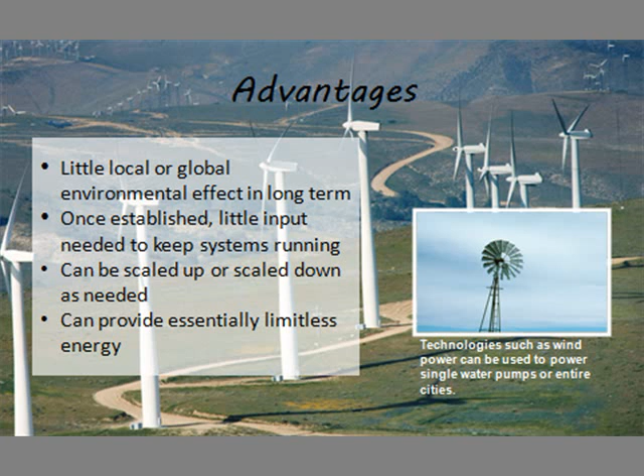As I wish they were, renewable energy resources are not the fantastic magical cure for our energy problems. There are large setup costs involved. For example, if you want to install a wind turbine or solar panels on your own home, it costs a lot in the short term, so it's very expensive to put into place. There is the possibility of environmental damage in the short term, and there's a limit to the efficiency of these systems, although hopefully with improved technology that can be overcome.

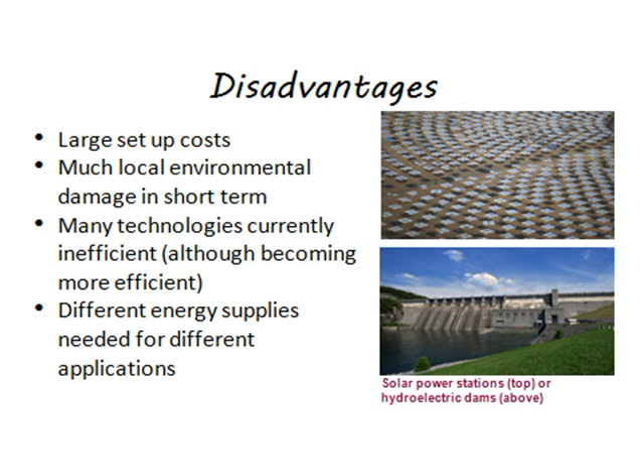And then, renewable energy resources aren't this kind of cure-all for our energy needs. You can't just say everything's going to be good if we use solar, or everything's going to be solved by using wind power for everything. Each region has to use renewable resources based on what's available in the area. For example, you wouldn't want to use solar power in a place like Seattle that doesn't get much sunlight, and you wouldn't want to use hydroelectric power in a desert area with no rivers. So it has to be tailored to the local area.

We'll talk about several different types of renewable energy as we go through this lesson. Of course, we're going to talk about the big three: solar, wind, and hydroelectric. We'll also talk about a couple of technologies that are a little more experimental, like wave and tidal power as well.

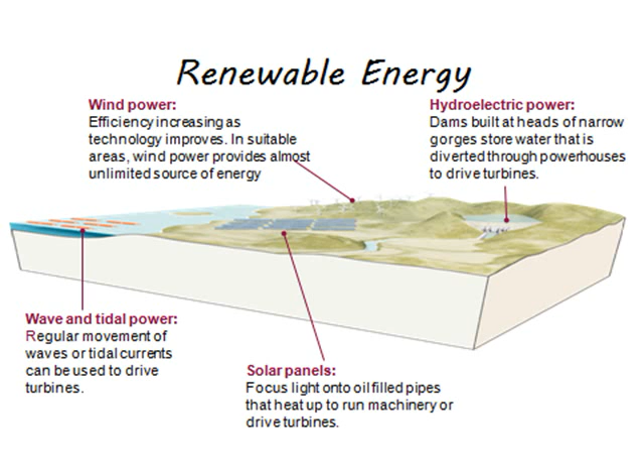Let's start with my personal favorite for the state of Texas, solar energy. If you ask most people what solar power is, they'll point out solar panels or solar cells, kind of like the ones on simpler calculators. But the truth is there are lots of different ways to use solar power. There's active solar power and there's passive solar power.

Passive is the easiest one to use, probably the cheapest one to do. It tends to happen when you're designing buildings that you'll figure in passive solar power, making sure windows are faced in such a way that they'll receive maximum sunlight, especially during the winter when you want to warm your house. Or you can use active solar power, for example if you want a solar powered water heater, which will heat up your water without using electricity.

Here we see passive solar design. The house is designed so that during the summer, with the angle of the sunlight coming in, it's not going to hit your windows, so you won't have extra heat in the house. However, when the angle of sunlight is shallower in the winter, you'll get some sunlight entering the house to help heat it up. And this requires no extra energy, no moving parts, and no expensive solar panels either.

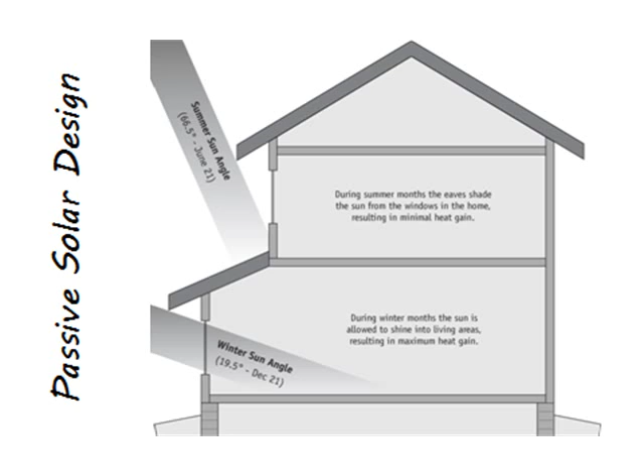On the other hand is an active solar collector. It looks like it has a solar panel in place, but that's actually a panel that absorbs heat from the sunlight, heating water so you can have a water heater powered by solar energy. There is a pump necessary to move the water around, and because it's actively using energy, that's why it's called an active solar collector. These are supposed to be pretty efficient and money and energy saving, since one of the major expenses in a house tends to be heating water for the water heater. So someday I hope to get one for my house too.

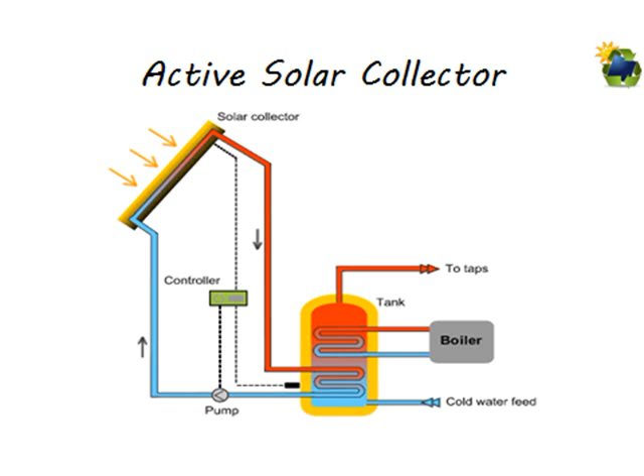So here is what most people think of when they think of solar power: a solar panel, otherwise known as a photovoltaic cell. Keep in mind the 'photo' in there means that it's activated by light, that's why you need the sunlight. The 'voltaic' part refers to the electricity that's being produced.

So how does one of these work? Well, you have to have a special material called a semiconductor, and you have a layer of that in the photovoltaic cell. When it gets hit by sunlight, an electron gets excited, kind of in the same way one gets excited during photosynthesis in the chlorophyll and pigment of a plant. In this same way, an electron gets excited after being hit by sunlight and absorbing the energy from it.

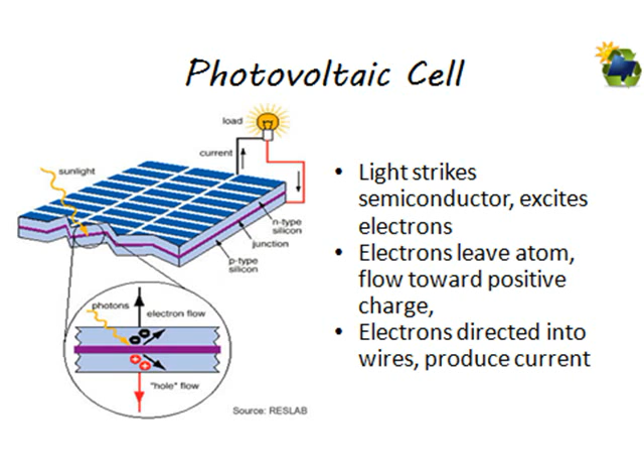Contrary to what you might imagine, a solar power station isn't actually a ton of solar panels all lined up. Solar panels tend to be pretty expensive, so you don't want to build a huge array of them. What's actually cheaper is to build something with mirrors that focus the heat or light of the sun. That warms up something, and that substance can be used to heat fluid or produce steam, which turns a turbine just like in traditional electric generating power plants. That's how most solar power stations work.

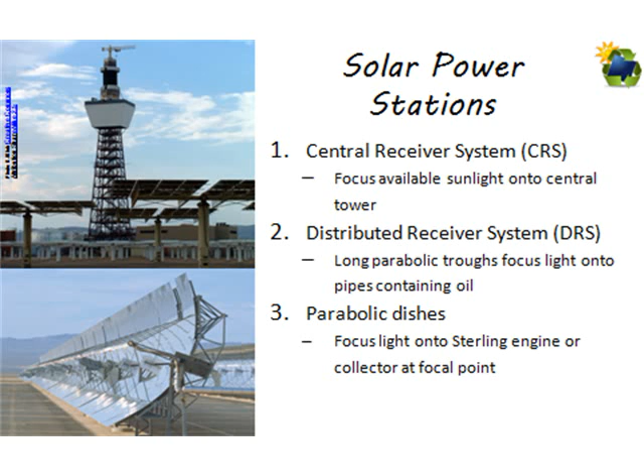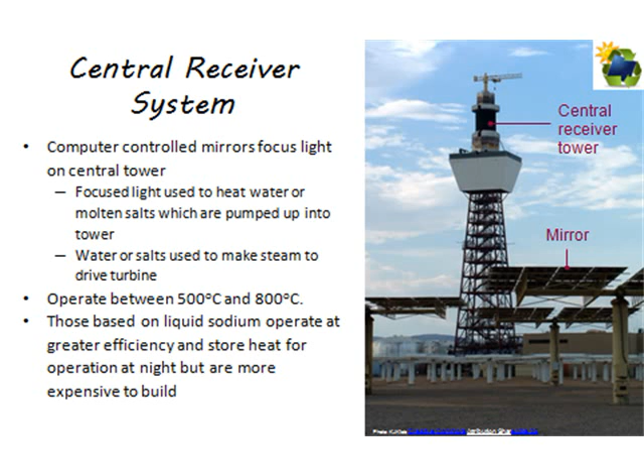Different solar power stations operate by different methods, though. You've got the central receiver system, where mirrors focus all the light on one central tower. That's where you'll have water or, in some cases, molten salts, which need very high temperatures to melt, heated up by this combined heat. After that, it's just traditional electricity generation.

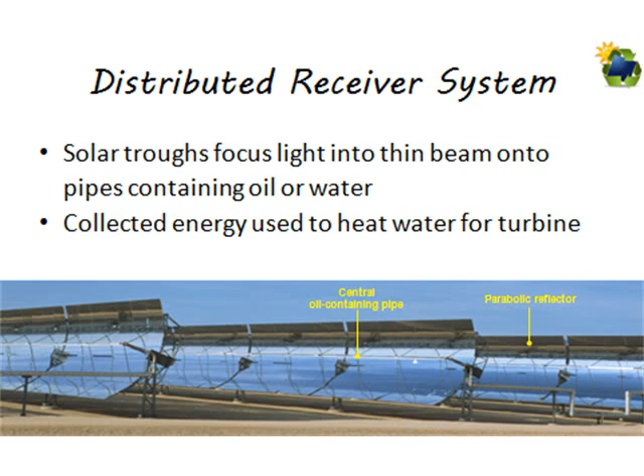A distributed receiver system, on the other hand, doesn't use a central tower. Instead you have curved mirrors that concentrate the light at a certain point, a certain distance from the mirror. At that point you've got an oil-containing pipe, containing material that heats up with all that focused light, and then you can use that to heat water to turn a turbine. Different methods of collecting the solar energy, but in the end the method of electricity generation tends to be pretty much the same.

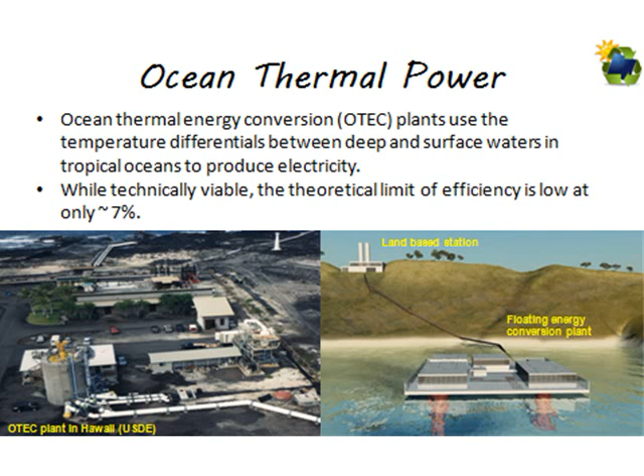Ocean thermal power is kind of a subset of solar power, since it relies on temperature differences between deep water and surface water, which is ultimately caused by the sun. You can use that to produce electricity, but it's really only useful in tropical areas, and it doesn't give you a lot of energy, so it has a low net energy yield. It's probably not going to ever be a very widespread technology.

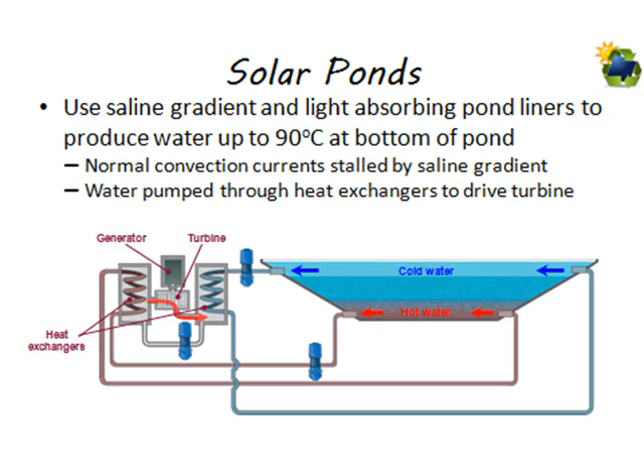Solar pond is another type of technology. Basically, you're getting the solar energy to heat up some water. To keep traditional convection currents from forming and allowing heat to escape into the air, you create a saline gradient, which disrupts the currents that could flow. You then have this light-absorbing material in the liner of the pond, which absorbs a lot of energy and heats up water. That water can then be used to heat up other water to create steam, which turns a turbine. So, a variation on the same theme.

They heat some water or some oil or some salt solutions that end up transferring their heat to the water that's turned into steam.

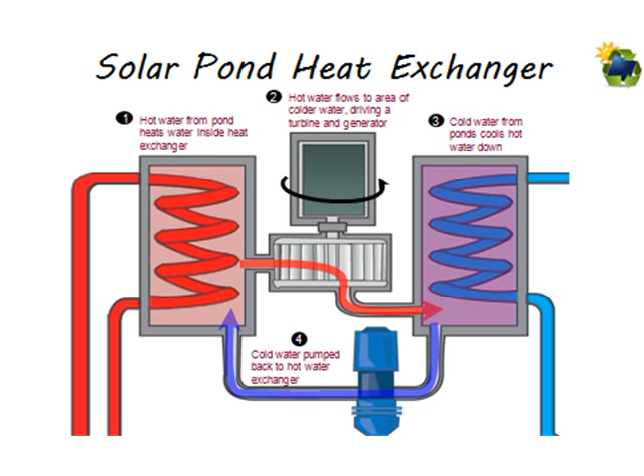Just a summary of the advantages and disadvantages of solar power. While it can theoretically provide a limitless supply, especially in areas with a lot of sunlight, that's not going to be efficient where sunlight is limited during certain parts of the year. There's a relatively high gain of energy, and it reduces reliance on foreign oil, which is an advantage of all the renewable energy resources.

It doesn't produce a ton of pollution just in making the solar panels or collectors, and that's the major source of environmental impact. Another drawback is that it can only produce energy during the daytime. However, you can develop the equivalent of giant batteries that can store this energy so it can be used at night.

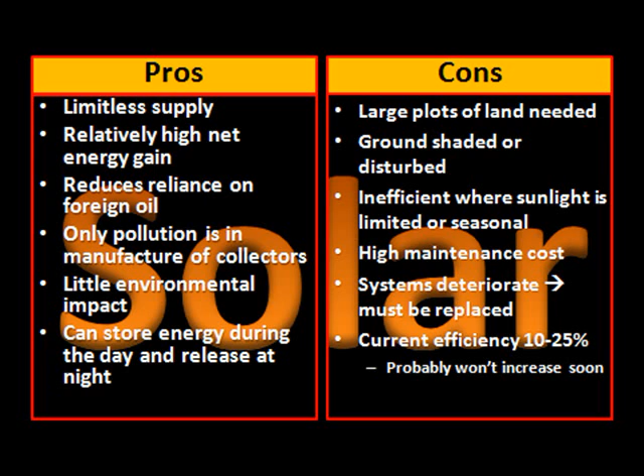Globally, as of when these images were produced, probably around 2007-2008, wind power produced about 1.5% of the world's electricity needs. However, it's not being utilized as much as it could be. For example, some estimates have said that wind power could generate most of the electricity needs of the United States from just a couple of regions having wind farms.

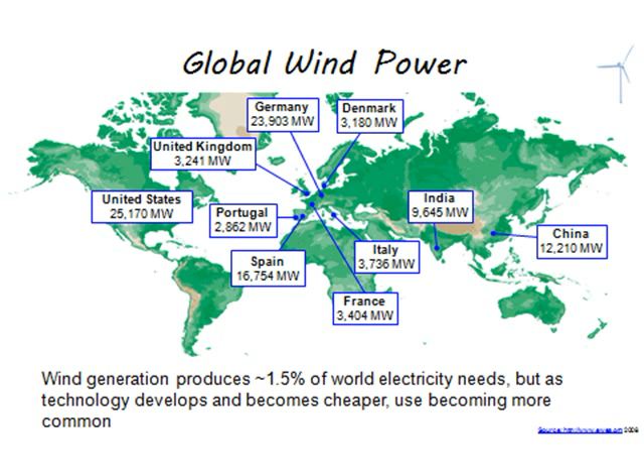As said on the previous slide, wind power has the potential to generate a lot of electricity. In fact, if you used wind farms in North and South Dakota and in Texas, you could provide electricity needs for the entire United States.

A couple of general facts about wind energy: if you want a completely efficient wind turbine, you need relatively constant speeds, around 20 kilometers per hour. There are some locations that are better than others for wind farms, such as tops of ridges, mountain ranges, coastal areas, and anywhere there are wide open plains.

The average turbine will produce anywhere between 40 and 400 kilowatts of power. This obviously depends on the size of the turbine. A couple of factors affect the amount of electricity produced.

For example, a very tall wind turbine will catch faster air currents and produce more electricity. And if you increase the length of the blades, that increases the electricity produced. In fact, if you double the length of the blades, you get a 4 times increase, or a 400% increase, in the amount of power produced.

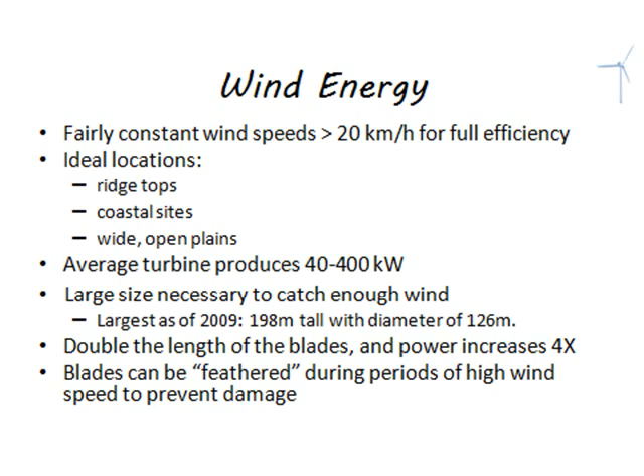Wind turbines do use the movement of a fluid to turn a generator, but they're not using steam, they're using the movement of the air itself. Remember, air is a fluid as well, it moves. So what happens is when the blades are turned, this is ultimately going to drive magnets inside wire coils, and that's going to produce electricity.

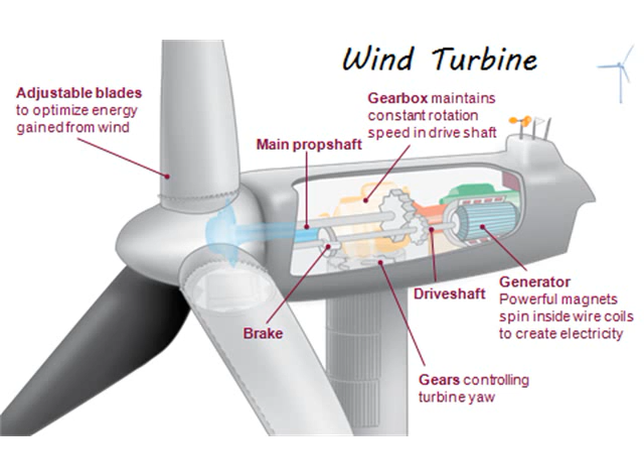That was our extremely brief presentation on wind energy. Some pros and cons: you can build wind farms relatively quickly, and you can even build them on sea platforms, so you can build them offshore. Once you get them built, maintenance is low and can be automated, so you don't have to have a person going out and maintaining these wind farms. You get a pretty decent net energy yield, and it doesn't produce pollution. A lot of times these are located in remote areas, so it won't bother people. And if you have these large turbines, you can use the land underneath for agriculture, for raising animals, etc.

Some of the drawbacks: you do require an area with steady wind, which minimizes the locations where you can use this. You have to have some backup systems in place for when you don't have wind. People consider them noise pollution and visual pollution, meaning they interfere with the pretty view. There's talk of noise pollution, although I've spoken with people who have been directly under wind turbines and they say there's no noise produced.

A big problem with wind turbines is that they can actually end up causing death of birds, bats, anything that flies in the air, because the animals don't see the turbines and they end up hitting them and dying. A major way to avoid this unnecessary death of wildlife is to research before you put a wind farm in place, making sure you're not placing these wind farms in major migration patterns. Birds tend to use the same route when migrating every year, so if you know thousands and thousands of birds are passing through an area, don't put a wind turbine there.

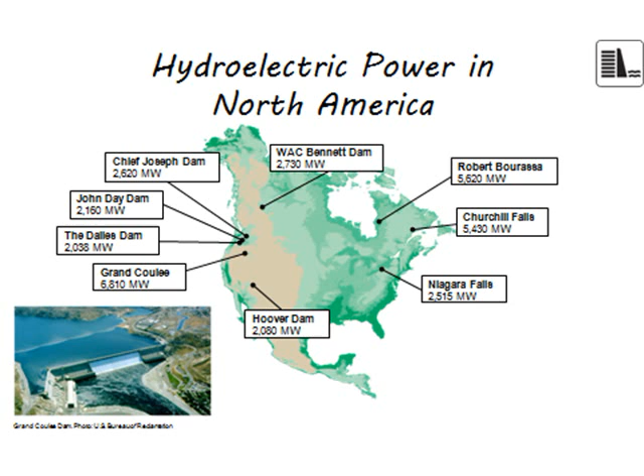Here in North America, we have a number of dams that produce electricity. The one that produces the most is the Grand Coulee Dam, up in the Pacific Northwest. The Hoover Dam is particularly famous; it's on the Colorado River. There are actually a number of dams on the Colorado River, which we'll talk more about when we discuss land and water management. You also have hydroelectric dams in Europe.

You've got to keep in mind, I said that the country of Germany uses a lot of renewable energy, but the thing with hydroelectric power is you've got to have a river in place. So apparently Germany doesn't have any rivers that are very easy for it to dam up.

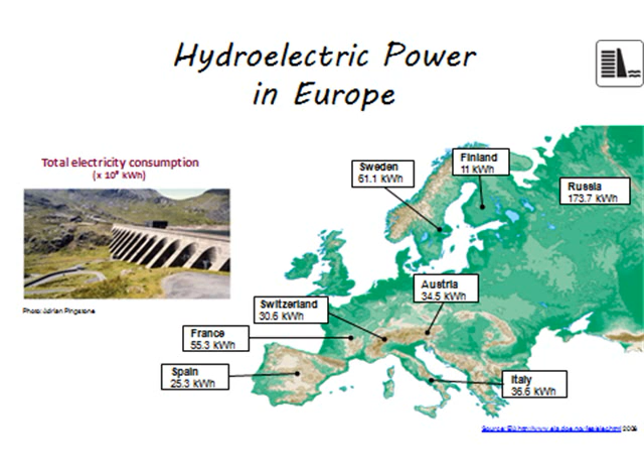Hydroelectric power is all about the potential energy behind water. When water has to go over a height, over a cliff, something like that, the potential energy of that water before it goes over the cliff can be pretty high.

So what happens is, for a dam, you are blocking up a river, building up a reservoir, and there's a lot of potential energy stored in the water in that reservoir, which, being pulled down by gravity, would, if unimpeded, flow down whatever obstruction you have.

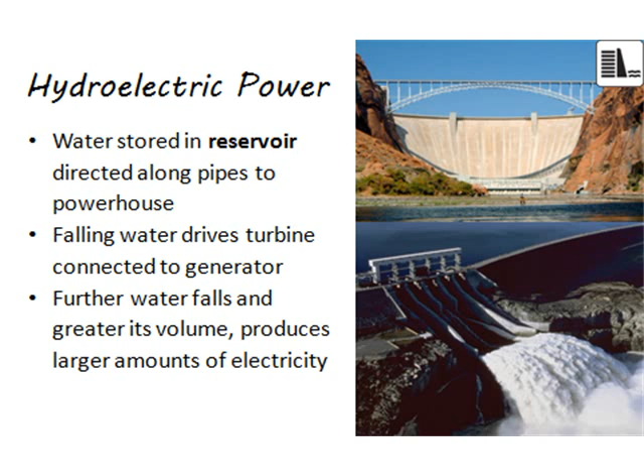When that water is allowed to flow, it's driven through pipes, and those pipes go through a powerhouse where the water turns a turbine, connected to a generator that produces electricity. The further the distance the water has to go, and the more water you have, the larger the amount of electricity you'll be able to produce.

So here you see a hydroelectric dam. The water is going to be flowing from the right to the left. You see the reservoir on the right-hand side, the water flowing down. It's going to turn a turbine, and then it'll end up flowing further down river. Notice you see the powerhouse, you see the generator, and all of that.

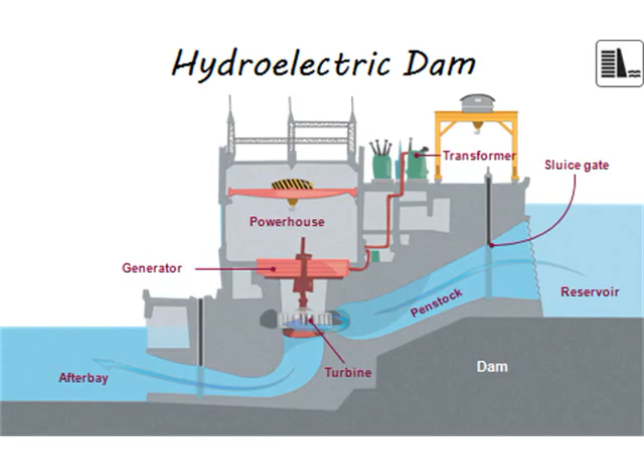Now we get to the pros and cons of using hydroelectric power. One of the pros is you can actually control the flow of the water downstream. If there's flooding upstream of a dam, you can catch that extra water in the reservoir, and that will prevent flooding downstream. Once it's built, the cost to operate and maintain it isn't very high. You're not going to produce any pollution from producing the electricity, and dams can last a long time.

They also give a pretty good net energy yield, and when they create lakes, that creates areas of water recreation. In fact, in North Texas, we have about one naturally occurring lake. So all of the lakes you may go to, Joe Pool Lake, whatever other lakes there are, all of those are man-made by damming up the Trinity.

There are, however, a lot of negative consequences of dams. It creates a large flooded area upstream of the dam, and if there were people living there before, they're going to be forced to move.

When water approaching a dam slows down, that slower moving water can harbor pathogens like mosquitoes. When you flood an area behind a dam to build a reservoir, that destroys any wildlife habitats in that area. Fish don't mix very well with dams, especially fish that swim upstream like salmon, and that affects fish migration.

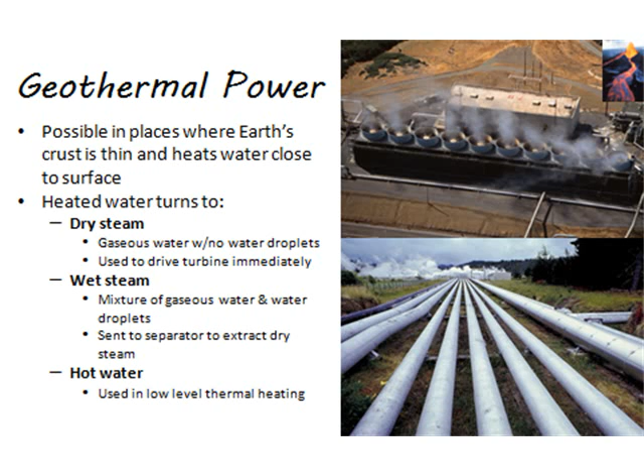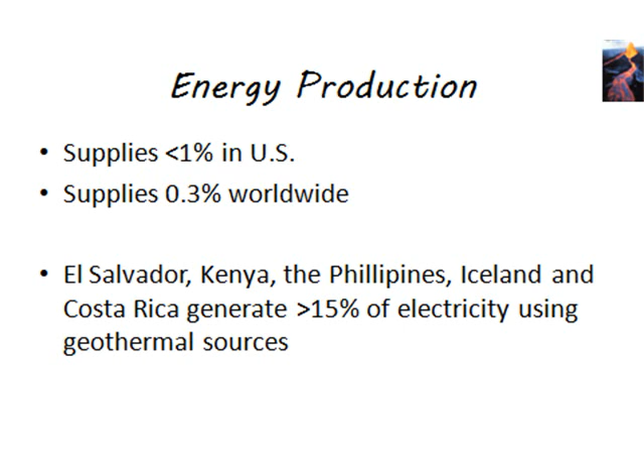Geothermal energy doesn't tend to produce a ton of electricity throughout the world or the United States. There are some countries like El Salvador, Kenya, the Philippines, Iceland, and Costa Rica which generate more than 15% of their electricity using geothermal sources.

So there are limits to where you can use geothermal energy, which is one reason why it'll probably never be a huge producer of electricity for the whole planet.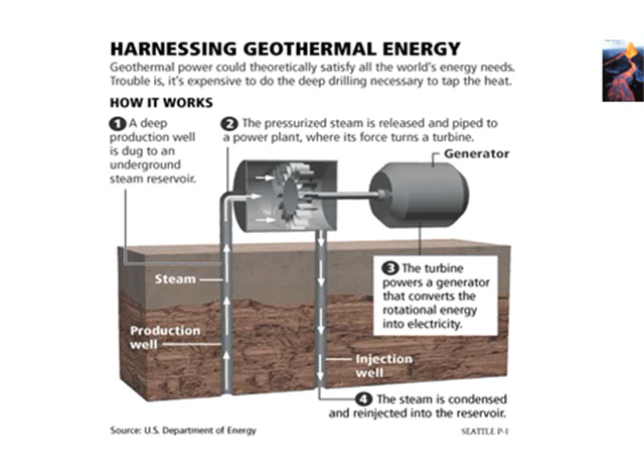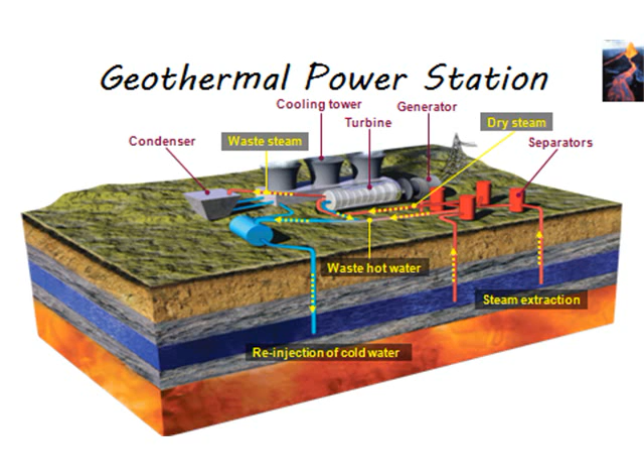This is just another, more complicated view of the same thing. If you really want, you can pause it and look at all the steps. I'm not going to waste our time talking about it again.

Let's summarize geothermal power. You do get a pretty good net energy yield from it, and it has some high efficiency. You can also have this resource be used indefinitely if you manage it properly. It doesn't produce air pollution or carbon dioxide, which is a big plus. Also, in areas where geothermal energy is usable, the cost is competitive compared to fossil fuels.

Unfortunately, there are a number of downsides. You can't use geothermal energy everywhere, and if you don't manage it properly, you will deplete the resource and won't be able to use it again. There's also some noise and odor pollution caused by it—basically, it smells bad. If you're extracting water, that can cause subsidence, meaning sinkholes and sinking of the ground.

Here's a big thing: it can increase tectonic activity. You're already doing this in an area that's generally prone to tectonic activity. What can happen when you start drilling and putting pipes into place is that you can cause earthquakes. There was one site in Germany where they were trying to put in a geothermal power plant, and while drilling, they had a series of 1,000 small earthquakes in a short period of time, at which point they decided it's probably best not to drill in this area.

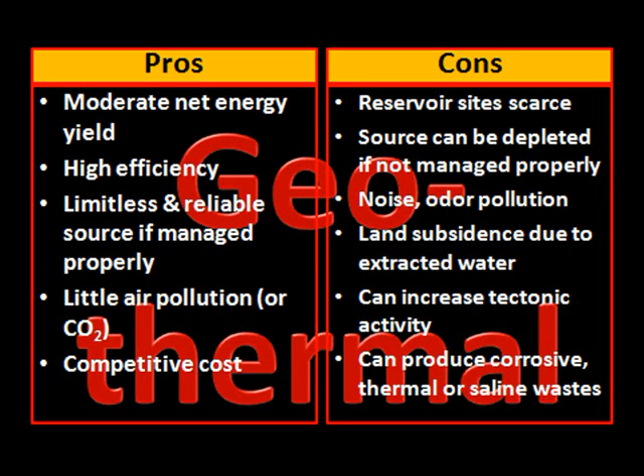Another thing is you're letting stuff from deep underground come up to the surface. That can produce saline waste, release some corrosive chemicals, and also produce some thermal pollution as well.

We're going to move on to what plants can do for us. Biofuels are when you turn plant matter into fuel, particularly for cars. Biofuels are made from fermenting plant matter—actually basically the same process used to make alcohol. What's produced when making biofuels is ethanol, not drinkable ethanol, so please don't go to a gas station and try to drink from the pump. Mostly it's not used on its own, it's used as an additive to gasoline to help extend it and make our gasoline supplies last a little longer.

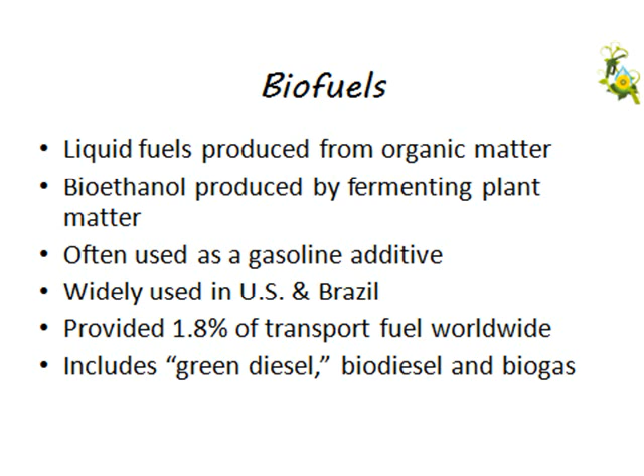The two countries where it's used the most is our country, and then Brazil uses it a lot too. It's the source of about 1.8% of all the world's transport fuel. This is biofuels - there's bioethanol, biogas, biodiesel, and green diesel as the different types.

There are several different sources for biofuels. Traditionally in the United States we use corn. In Brazil they use sugarcane. Although there are movements to try and find ways to use other sources.

For example, when you harvest plants, a lot of times they pull up the entire plant, but we only use a small part of it. The thought is to try and use some of that plant waste as a source of fuel for biofuels. There's also the thought to try and use switchgrass, which is a type of grass that kind of grows as a weed. If you could use that, you could use land that's not devoted to agriculture, and therefore you wouldn't be competing with food resources being produced on that same land.

Another source you can use is animal dung - you dry it out in the sun and then burn it later as a fuel source. Don't get too grossed out, that's done in a lot of parts of the world. Another way you can use it is by sticking it in a fermenter or digester where you let bacteria break it down. Mostly what you want them to produce is methane, which is biogas that can be burned for fuel. That's renewable because there's a never-ending supply of poo on the planet.

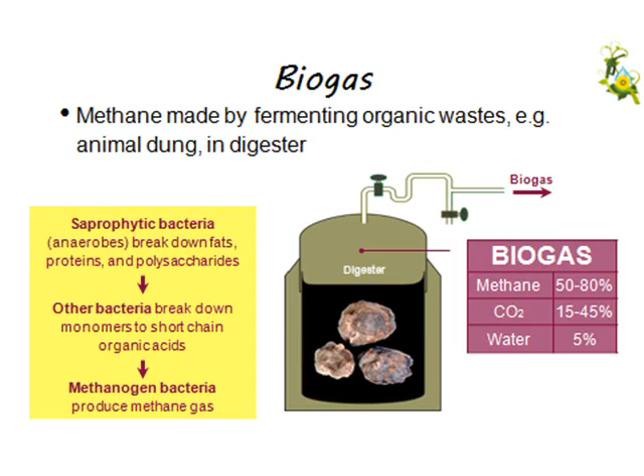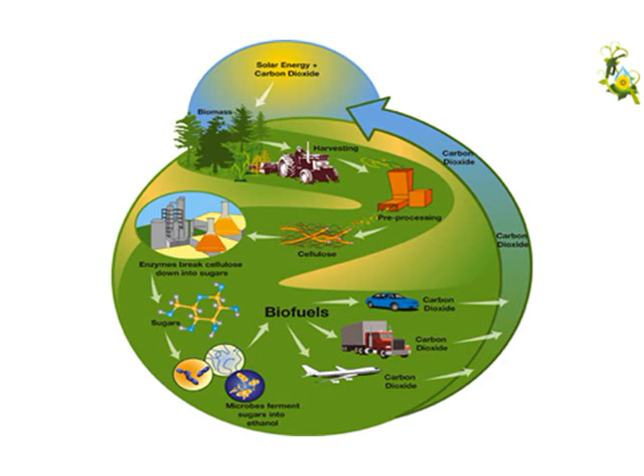Okay, so the pros and cons of biofuels. When you use it sustainably, and make sure the biofuel you're burning is balanced out with the rate at which you're planting new plants to take up that carbon dioxide, it's renewable and won't disrupt CO2 levels. When you burn it, it produces fewer other air pollutants than fossil fuels, so it won't produce sulfur-containing or nitrogen-containing compounds. And if you can do this with plants that aren't food plants like sugarcane or corn, then you can plant in areas not wanted for agriculture, use it to reduce soil erosion, and also create jobs in rural areas.

Now for the cons. It requires water and fertilizer to grow these plants. And as we'll talk about in a couple of weeks, when you use a lot of inorganic fertilizers, herbicides, or pesticides to kill unwanted weeds or insects, that can cause environmental damage. Another thing - this can cause deforestation. For example, in Brazil, where they use sugarcane, they'll often cut down chunks of rainforest to find a place to plant their sugarcane so they can make biofuels. That is obviously a bad thing.

If you don't burn this efficiently, like in the proper engine, it can cause air pollution, which means you have to have a car designed to run at least on a biofuel or biofuel mix. One of the biggest concerns is that a lot of land previously used to grow food for people is now being used to grow food for biofuels. So when we have a growing population and limited land for agriculture, what are you going to grow the food for? Are you going to grow it for people or are you going to grow it for cars?

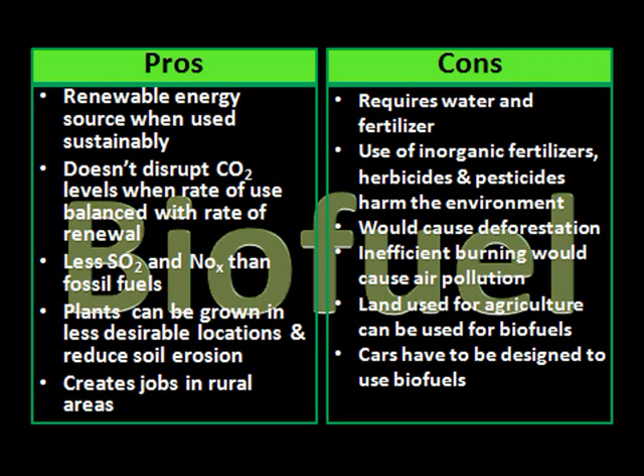All right, biomass is another way of using living matter to produce energy. A lot of times what happens is you burn the biomass. So a common biomass fuel burned for energy is wood - hey, it's what people used to use for energy before they discovered coal. You can also use biomass to make plastic products. More and more now, especially if you look at, for example, a Dasani water bottle, you'll see it says it's a plant bottle - made from plastics produced from plants.

This does supply a small amount of United States energy. I'm not talking about wood burning, I'm talking about burning other biomass. If you grow plants for this that have really extensive, deep, complicated root systems, that can actually take some carbon out of the atmosphere and stick it in the soil.

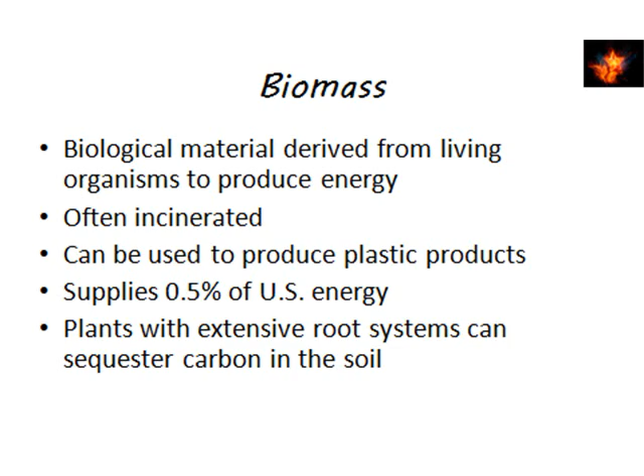So on to the pros and cons. What you can do is use parts of plants that you wouldn't use otherwise, so that's a useful thing. Sources I've read say you can collect and recycle the ash - I'm not sure how you recycle ash, though I believe you can use it for concrete and stuff. It'll also reduce the impact on landfills, because if you're just throwing away the unused parts of a crop plant, that'll end up in a landfill somewhere.

The net energy isn't too great, which is one of the cons. Part of that is because you've got to use energy to dry this stuff and transport it to a central facility, because if you don't burn it in a central facility, that can cause some bad air pollution. It also produces CO2 as well.

We're also trying to use ocean waves and tides to produce electricity as well. Sorry for the delay there, one of my cats was twitching.

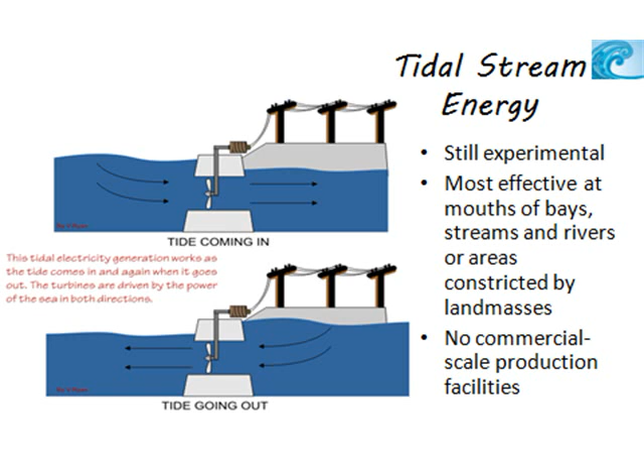This form of tidal energy actually results in blocking off an area where you have water coming in. You have this narrow area through which you're forcing water to go through, and as it goes through, it's going to turn a turbine. It's mostly going to be effective in areas where you have a narrow area where water's trying to get through, or water's constricted by a landmass - a bay, the mouths of rivers, etc. It's not a fully operational technology yet, so there's not a lot of commercial scale production.

I'm going to be showing you some more experimental ideas that haven't actually been put into production or use. This is a concept where you basically have these turbines out in the water, and as the water moves past - you put this near land where you'd have tides coming in and out - that would produce electricity because the water would turn the turbines. There are concerns about marine life getting killed by this, though, or it interfering with boats and ships trying to move through these areas.

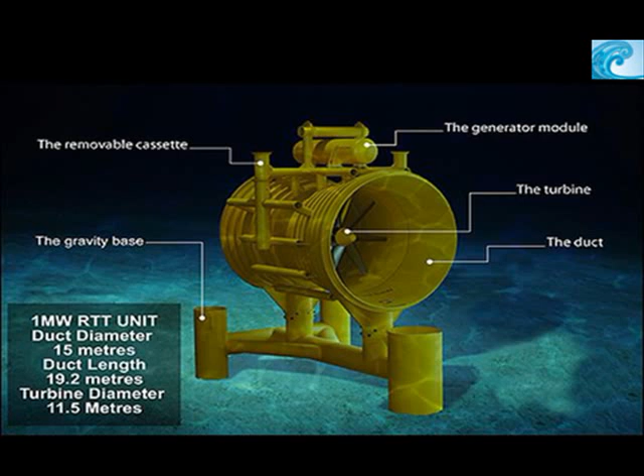A similar system, although it looks like it's more in deeper areas, and takes up maybe a little less space so it wouldn't get hit by fish or other creatures as much, but it's still the same principle of a turbine turned by the movement of water. This is one of the experimental technologies I found particularly cool: wave power. You're using the movement of water as waves go in the ocean to produce electricity. Unfortunately, it's kind of a difficult thing to put in place, so it's probably not going to be lacing the surface of the oceans anytime soon, but it's still a really neat idea.

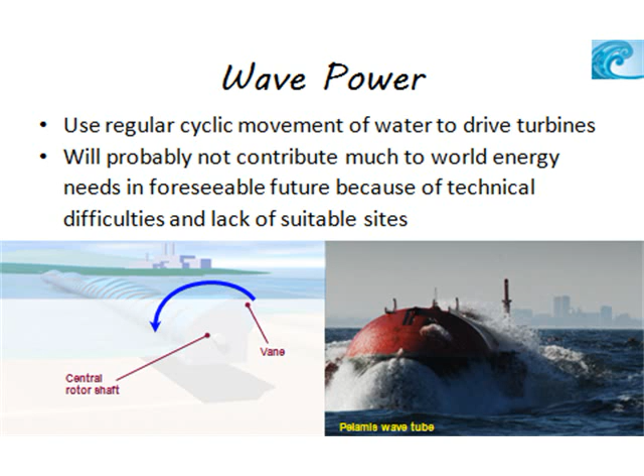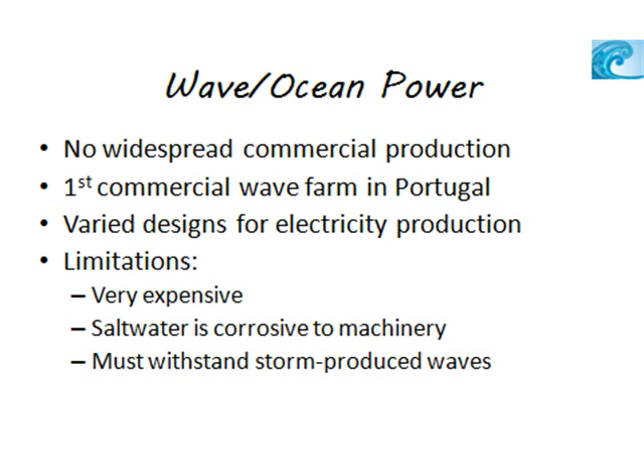Here's a few more details on wave power. There's not really widespread commercial production of this, although there is one commercial wave farm off the coast of Portugal. There are a couple of different designs you can use to produce electricity - we'll talk about two of them on the next couple of slides - but there are limitations with anything in the ocean. It's pretty expensive, and you also have the problem that salt water will eat up machinery, so you're going to have regular replacement, or try to find something salt water will not eat through, which is very difficult. Also, it's got to withstand waves produced by large storms without getting too damaged.

Here we have some really neat wave tubes produced by the Pelamis Corporation, I believe. They have these long sets of tubes laid across the ocean, anchored in place so they don't float away. As the waves move, they'll bend these tubes because they're not long solid tubes - they're connected by hinged areas. When those hinges bend, that actually moves hydraulic fluid, which turns a turbine and a generator, producing electricity. So the movement of the waves is what actually produces the electricity.

Another idea that I find particularly neat, although I don't think it's anywhere near a stage of production, is where you basically have these large buoys. Now, they don't look very large in this picture, but in reality they would be about 12 feet tall, which is about 2 times the height of some of the tallest people you can find.

You have this magnetic shaft on the inside that's anchored to the seafloor, so it's not going to move. But the outer casing and the electric coil connected to it can bob up and down based on the height of the water surface. So as a wave comes through, that outer casing and coil move up and down, and when magnets move through an electric coil, that produces electricity. I thought that's a pretty neat idea, so I demand one of y'all go out and build it.

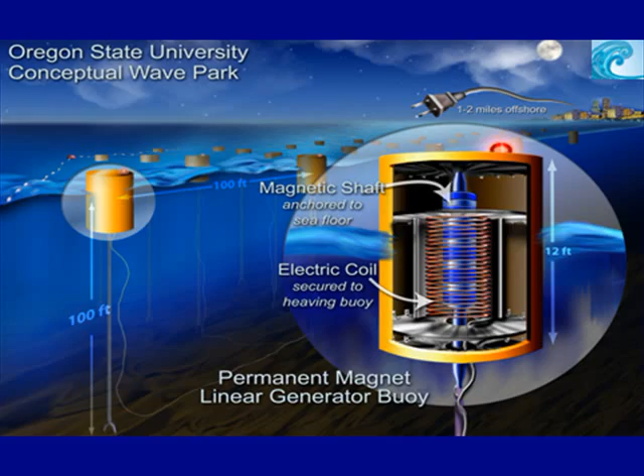Now we come down to hydrogen fuel cells, the dream of many a car maker, or what you would think after you watch Who Killed the Electric Car. One of the big things about hydrogen fuel cells is that you've got to find some way to produce the hydrogen first. Hydrogen is the most common element in the universe, but it's kind of hard to purify it out from air. So the most common way to produce hydrogen is to take water and split it into oxygen and hydrogen. Unfortunately, that takes a lot of energy.

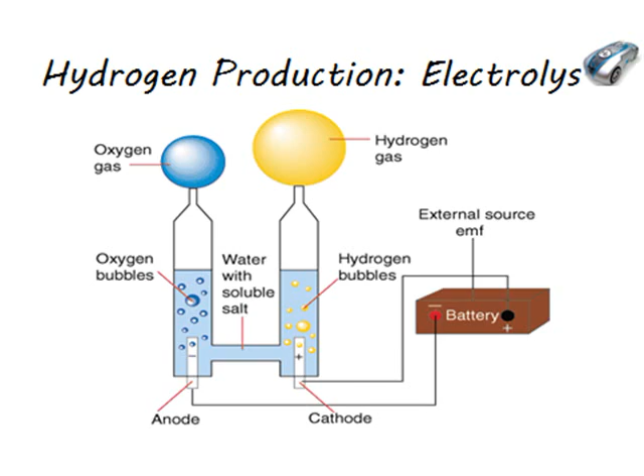Now, the technology is still developing. When I got these slides that I use for a lot of the PowerPoints, it said it was expected in the marketplace by 2010, but we're in 2014 and we don't really see it yet. So there are obviously a lot of problems with hydrogen fuel cells as a power source.

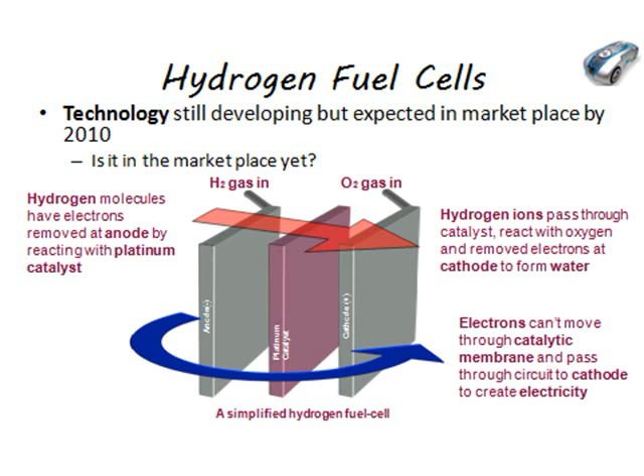On to the pros and cons of hydrogen fuel cells. One of the biggest pros and attractions is that the only waste product it produces is water, which is great, we need water. You can also use salt water for electrolysis, which is great because if it was only fresh water being used, we'd have a problem since we've got limited freshwater supplies. So that part's going to produce not too much environmental impact.

You can also transport hydrogen through pipelines, and supposedly you can store it in compounds to make it safe to handle. Although if we look at the cons, there's the fact that it's currently difficult to store hydrogen for use in automobiles, which is the biggest intended use of it. Another big con is it takes a lot of energy to produce hydrogen from water or from methane, which means you're going to have a lower net energy yield because of that. And then to change all of our infrastructure, currently devoted to transporting and using gasoline, over to hydrogen would be very expensive.

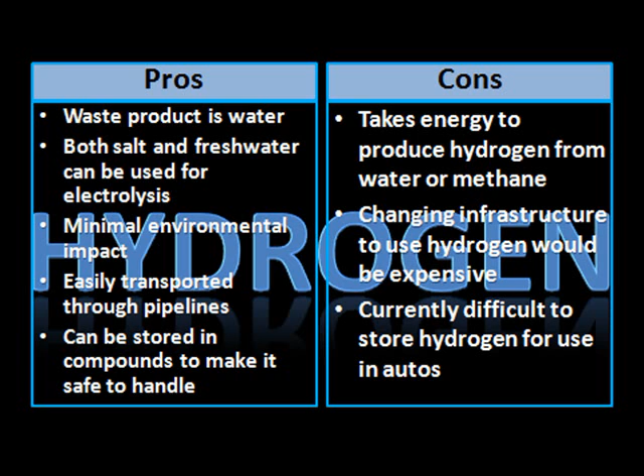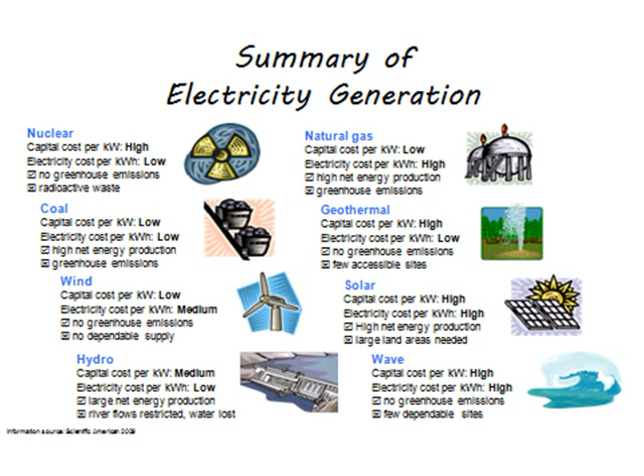Here's a summary of some of the different methods of electricity generation. Notice it's got renewable and non-renewable sources as well, kind of to cap off the whole energy topic. I'll let you guys pause this if you want to look at it. I'm not going to go over each and every part of this though.

I hope you've taken away one thing from this lesson, and that is that there's no cure-all for our energy problems. So one of the things we're going to have to focus on more in the future is conserving energy so that we need less of it in the first place.

We have limited energy resources as far as fossil fuels go, and renewable energy isn't perfect either. There are a lot of pros and cons to each source, so it's important not to waste energy.

A couple of things we'll focus on is making a household more energy efficient. We'll talk about hybrid vehicles and then some of the future energy solutions that are possible.

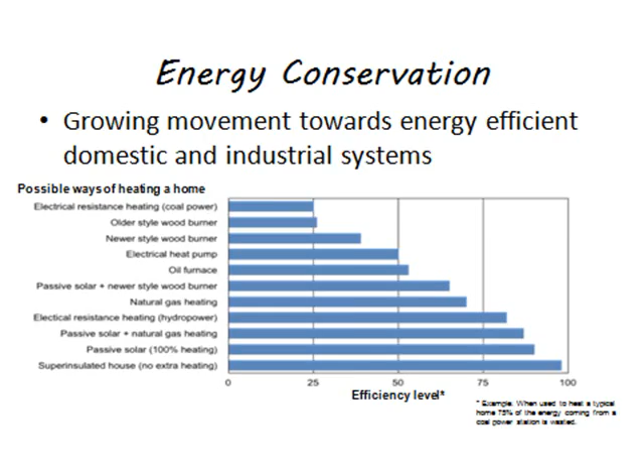Another big thing is what you use to light your home. A good thing is in the past few years it's become a lot more common to use compact fluorescent light bulbs, or the swirly ones, like what you see at the top. Those turn a lot more of the electricity they get into light, as opposed to the old school incandescent light bulbs. If you've ever tried to change one of those, they're very, very hot when they've been turned on for a while.

The reason is a lot of the electricity going into that bulb is not producing light, it's producing heat instead, which is a waste. You can use heat pumps also to heat your home, which produces more heat for the same amount of electricity. Solar water heaters will also help reduce electricity use, because one of the larger costs in a home is heating water in the water heater.

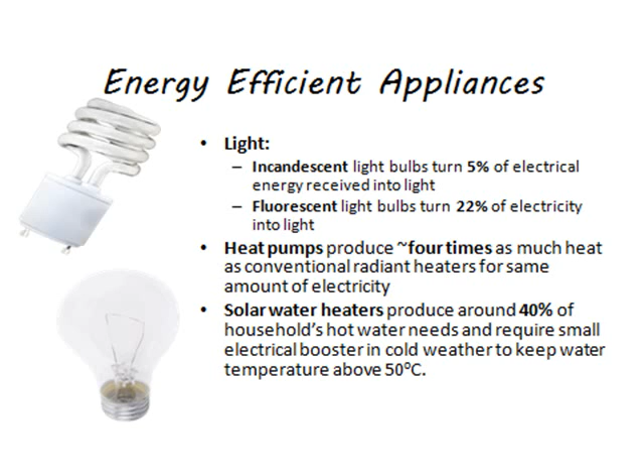Let's look at this energy efficient home. We're going to move through it starting with the top left hand side, going counterclockwise, meaning the opposite direction a clock runs. If you use energy efficient light bulbs, that's going to reduce your electricity use because you're getting more light generated, and they also tend to last longer.

You can use a heat pump, and you can also connect that to solar heating so you can heat your house. Energy efficient appliances use less energy. In the United States, you can see they'll have an Energy Star label on them that proclaims they use less electricity. You can also have underfloor insulation.

You can have water pumps that are heated in the attic or in the ceiling, and then you can use that to redistribute heat to underneath the floor. Heat rises, so if your building is built in the right way, it can allow for passive warming and passive cooling. Double glazed windows will reduce the heat lost through your windows. And then, of course, at the top, you've got solar panels to produce extra electricity for heating, lighting, cooking, and other things that you need.

Hybrid vehicles have become a much bigger trend in the past few years. I know we've watched Who Killed the Electric Car in class. Hybrid vehicles are kind of a stopgap measure in between getting fully electric vehicles. They have a gasoline engine, but they also have an electric motor, which provides the energy for a lot of the time when you are driving the car.

You're mostly going to use your gasoline engine when you're accelerating, when you need a little extra power. So that does improve fuel efficiency dramatically, but you still do need gasoline to power it.

There are a number of different hybrid vehicles available, the most famous of which is probably the Toyota Prius, although Honda and even now a lot of American car companies are starting to build hybrids as well. Hybrid SUVs are also in production.

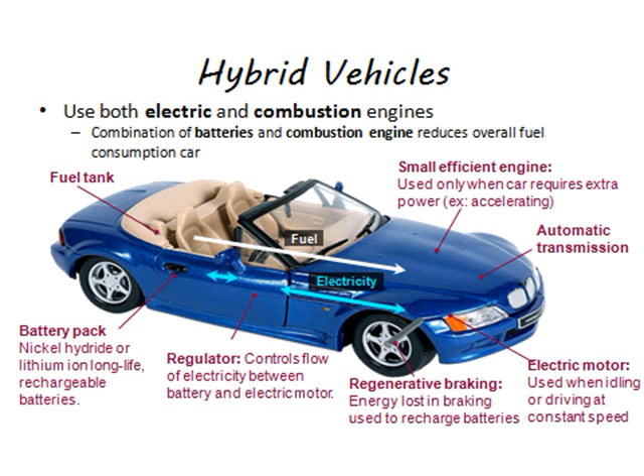A lot of the energy use in the world is used for transport, and a lot of that ends up not being efficiently used because internal combustion engines, the type we use to drive cars, produce a lot of heat and a lot of sound, which is wasted energy.

Ideally, the best thing to do would be to use public transport. Unfortunately, that's not always an option, especially here in Texas. Cities aren't designed for public transport, they're designed for you to have a car.

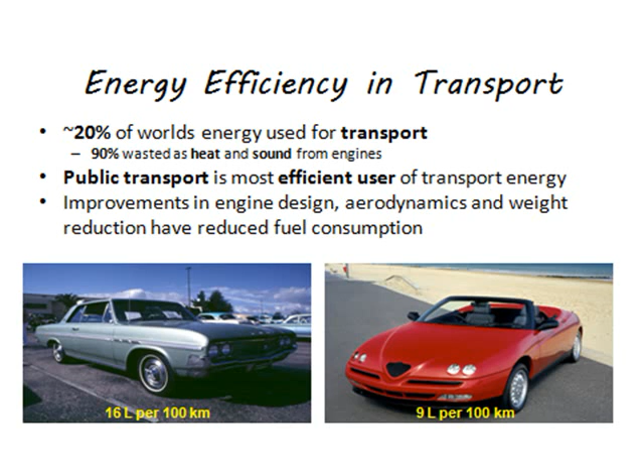But there are improvements in design that can help reduce fuel consumption. As long as when you get a chance to buy a car you vote with your dollar, you'll hopefully buy something with better fuel economy. Hey, it'll save you money in the long run when you don't have to buy gas all the time.

So let's look at some thoughts about the future. What are we going to do as far as energy goes in the future?

One of America's major exports is culture. Because of that, people in developing countries all over the world want the things that a lot of people in America take for granted: cell phones, cars, a lot of electrical appliances. That's going to increase the energy consumption of the entire planet.

A lot of this is going to happen in developing countries. You've got to keep in mind that a couple of those countries that are going to end up increasing their energy demand are places like India and China, where they just have a large population. So even bringing the standard of living up to not even the level we enjoy here in the United States will require an increase in energy consumption, which means fossil fuels just aren't going to cut it.

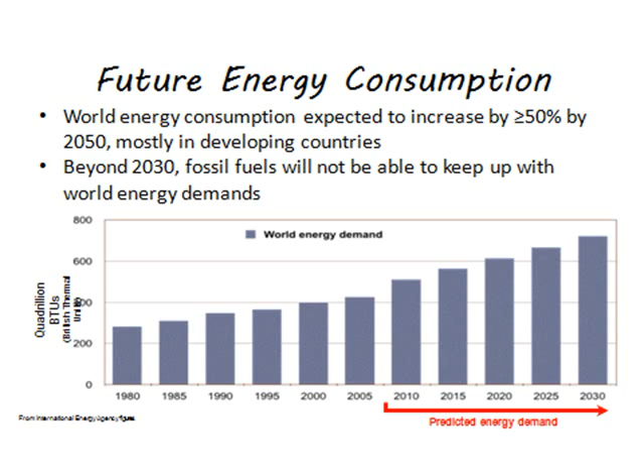So we've got to find some other options. Here's a couple of different thoughts. I'm a proponent of the fact that renewable energy is an extremely wise option.

I think it's a crying shame that here in Texas we don't use solar power. In July and August, when we're using most of the electricity to produce air conditioning, we're getting tons of sunlight that could be transformed into electricity.

Unfortunately, renewable resources may not be able to produce all the electricity we need because there are variables in play. If you have a particularly calm day with not a lot of wind, you're not going to get a lot of power from the wind turbines. If you've got a lot of cloudy days, you're not going to get a lot of power from solar power.

But if we start incorporating more and more renewable energy, we can back it up with fossil fuels so that we dramatically reduce our use of fossil fuels. They'll last longer and have less of an impact on the environment.

There's also the thought that we should start producing more electricity on a local scale, and the ultimate local scale would be producing electricity at our own homes. So increasing the use of solar panels, solar water heaters, or maybe even having neighborhood wind turbines might be a useful thing.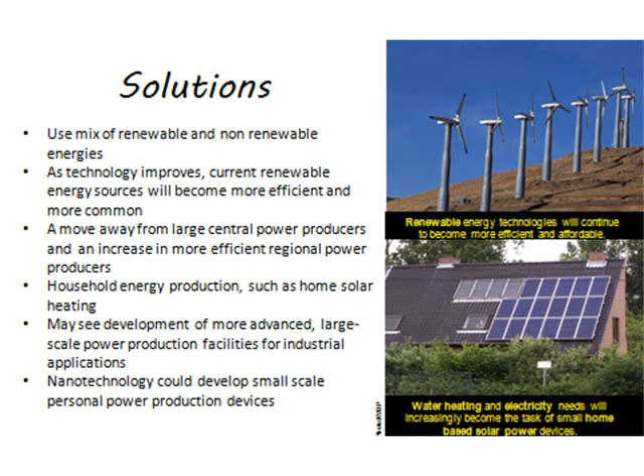Of course, technology continues to try to find other ways to produce electricity. Let's look at those in the next slide.

So those of you in sixth period already saw Jose Gomez's presentation on nuclear fusion. In his case, he was talking about cold fusion. That's the ultimate dream of energy science: to have a way to produce the massive amounts of energy that are produced by things that perform nuclear fusion, like our sun, which is the source of a lot of energy for our planet.

The problem is that when you want to achieve nuclear fusion on the level of the sun, you need extremely high temperatures and probably high pressures as well, which is very difficult to duplicate on the planet. So the dream is cold fusion, which can be done at pretty close to room temperature.

There's also thoughts of creating arrays of solar collectors in space that could then transfer that energy back to Earth. And there's even talk of trying to use nanomotors that use the movement of molecules to produce electricity, if you could get a large number of these working in unison.

These are all technologies that I'm telling y'all to go out and make. My talents don't lie in the field of engineering, or if they did, I don't know about it, so I'm depending on you guys to create this stuff.